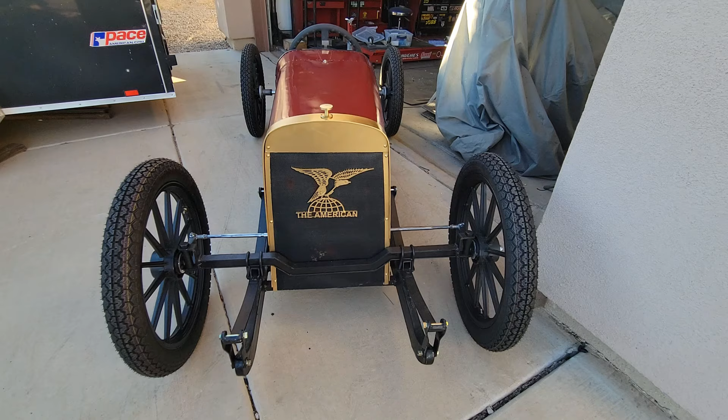Off the lift. A proud moment, a big moment. We're outside the garage, we're on our wheels. We're on the ground level.

It steers, it rolls, it stops. Still got to make the motor work. We got to get the motor working, but that'll come. That's the motor I actually took off of the Austin 7, so I know it works. I just got to get it running.

The American Underslung Speedster, they made them from 1909 to 1913, I believe. Had a picture of one that was from 1910, so I call this one a 1910 model. That was the particular one I used as inspiration.

It came out dang perfect. You know, I didn't share a lot of my drawings on this, but I used them as reference. I used the inspiration car, really dissected it, and I couldn't be happier. I wanted to catch that Art Deco, real rich color, the big presence, and I hope I got it. I hope I got it.

We got blood red on the paint there. This yellow anodizing, I like the way it made this aluminum look brass on the back, but I didn't like it on the front pieces. So I used gold - that's gold, and it looks brass. So I think I'm going to end up doing the gold back here to make it match. Just to make it match.

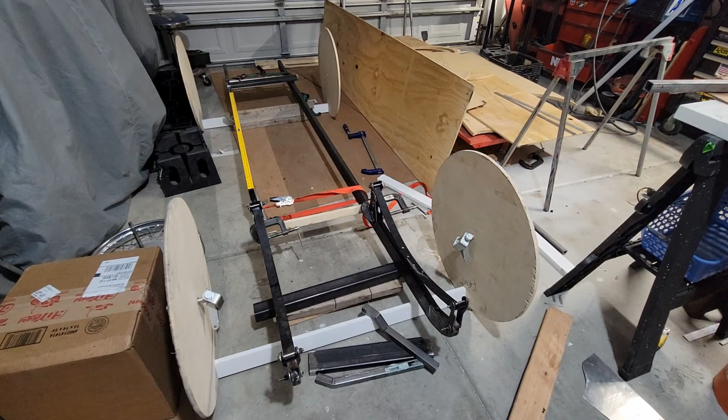All right, let's see how quick of a video I could make and bring you up to speed on where I'm at on this Edwardian build here, this Edwardian Cyclekart build. I ordered the 18-inch wheels, still waiting on them.

Don't have them from Thailand yet. They're the ones Kelly Wood and Steve Vinson talked about and shared information on the Cyclekart forum and on Cyclekart North America page. But I did get these, what are they, 275 18s. Pretty good looking rubber.

Good historic looking, vintage looking rubber. So with the tire, I got the size of my wheels, so I got some fake wheels cut for mock-up. I got them 36 inches inside to inside, so hopefully I'll end up with a 40-inch track and not be too wide. Kind of looks a little wide, actually.

31 inches on the inside to inside of my seat clamps right there - not seat clamps, spindle brackets. There we go, spindle brackets. I played around with my frame width.

I was going to go 18 inches in the front and 24 in the back, which is a little bit bigger than most people will run on a little small Cyclekart. You can get these things like 16 in the front and 20 in the back, and most people can still fit inside them. But this one is a big car. I wanted it to be big.

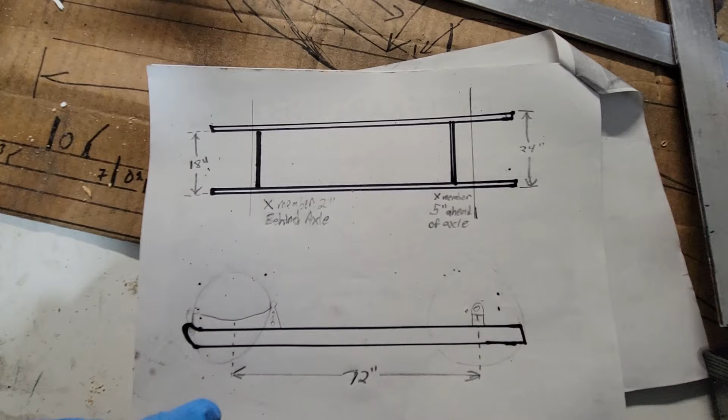It's an Edwardian, so kind of its size is a thing. 72-inch wheelbase, which is really long wheelbase. You know, if you're building a regular Cyclekart, aim for like 64, 66. Shorter is cuter, cuter is better in a Cyclekart. Remember, it's a caricature. But this thing's going to be a little bit of a monstrosity, so I wanted it to be big. So those were my starting points.

I ended up with I'm 20 inches, and I didn't like the tapered look of the frame, so I did a couple mock-up cross members, and I'm at 20 inches outside right now on what you're looking at now.

Did I say it's underslung? Of course it's underslung, the American, right? So the American had this cool looking front - the front end looked like this.

So we want that front end in there and play in with, you know, I got the ride height where I wanted it. I think I'm at 6 inches right now. Of course, it'll depress in the front. 5.5 in the back and 6 in the front is what it's mocked up on my floor right now. Got a level on there, trying to make sure things are level.

Nothing is welded in this frame, by the way, other than the front piece right there. The brackets for the rear of those springs - they are not even on there yet.

So we want that mustache cool front end, making front axles, or trying to figure out a front axle. I have a tube bender over there, but I wanted to make this one without it. As I started looking at the inspiration car and figuring out how I wanted the axle to look, the bend radius is such that the tube bender really wouldn't be great for this, because it would be difficult to get these in the right locations.

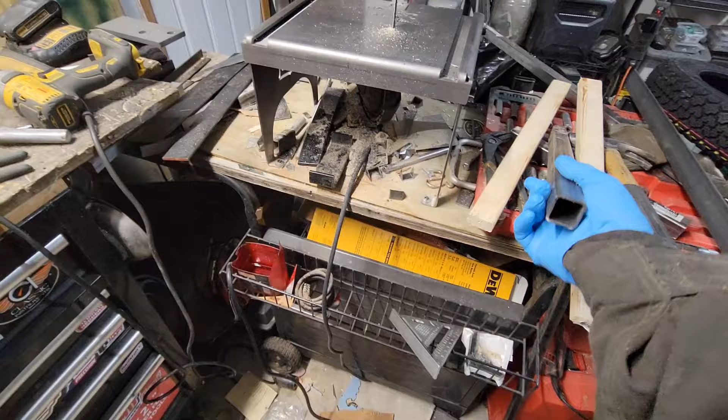And it's pretty thick wall stuff, by the way. This is not what you get from Home Depot. You get this from your local supply store, and it is 120 wall. It's pretty heavy duty. It's pretty heavy junk.

If you're worried about that being too weak, you could put flat stock on it, and then it makes it look like an I-beam if you put the flat stock on the top and bottom. I actually did a video, I did an axle for a buddy of mine like that, and it really makes it heavy duty. It looks kind of cool too, actually looks really cool. So that's probably what we're going to do on this one.

I use a piece of angle iron here as my straight edge, so I keep the thing straight. And sometimes these have a bend on the end where they meet the spindle bracket. This one's not, it's going to go plumb straight into it.

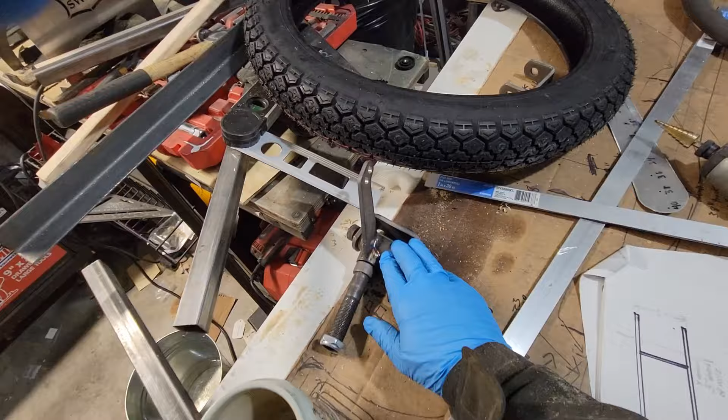And then I got to do this fancy looking gusset piece like the inspiration car to the top of the spindle. I'm not sure what spindles I have. I have some of Mark Parnell's fancy ones from an earlier project, I just didn't use them. But then I also got some Azusa's, so I'm not exactly sure which spindles I'm going to use just yet, but we're working on it.

All right, let's see if I can do a little bit of work here, and then come back and have it sitting on these things.

Well, okay, so I got a little carried away. Obviously, I got the flat stock on the top and bottom, booger welded on the back, just spotted on there. Go back and clean that up. I'm trying, I don't want to do too many welds on the front.

Could have used wider flat stock to make it more pronounced, give you more of that I-beam effect, but it ain't bad. I wish it was a little bit better, but I think once I get it painted, you'll see it'll have that I-beam look going on real good there.

And then getting the height right for those things, I could raise the whole thing up, but then it would have some crazy rake. So I made some little spacers in there for now. I'm not super pleased, I don't know.

There's only a minute of this. I worked on this for an evening here after work. I'm gonna work a little bit more, let's see what I could do. You know how it is, you get to working and you forget the camera. So yeah.

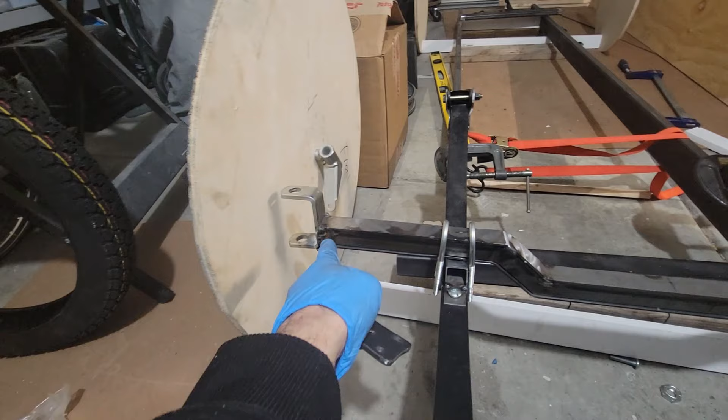So I put the center of this in the vise, and then I grabbed the end of it, not the bracket, but the end with a giant pipe wrench, and I torqued it back a couple of degrees, then eyeballed it till it was about right. I still got to run the bubble level on it and see where I'm at, but I think it's probably closer to 9 or 10 degrees.

All right, let me do some of that. Proof that I really don't know what I'm doing.

It is now 5 inches ride height. I thought I had it for 5.5 or 6. It was a couple days ago in my head, but if I put all these videos together, probably in the video 3 minutes ago I said what it was. I didn't write it down, so I don't know.

Alright, so the back wheels are still screwed into a support board holding them up. The front wheels, I took the support board off and just got them in F-clamps, and I got them on the spindles, so they're actually there. So the weight of the thing is actually on the suspension.

Interestingly, the cross members are not welded in. It's just a stick. Yeah, it's another stick back there with a ratchet strap holding it tight. But right now, I could take the ratchet strap off because the front suspension is holding it together.

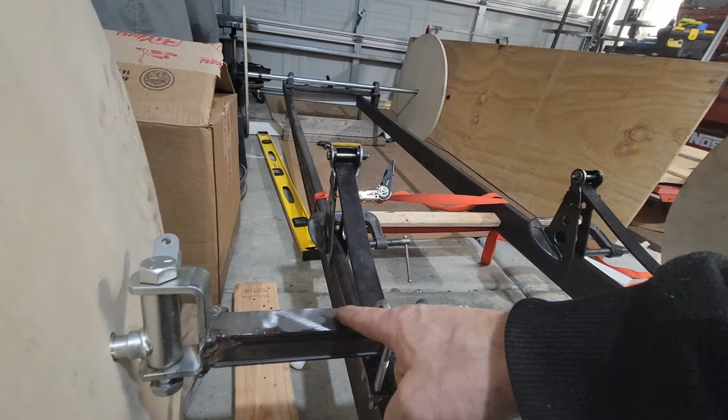And what? Oh shoot! I didn't run the bubble level yet. Hang on. Yeah, there you are. It is. There you are. It is 7 degrees. Both of them.

How did I get them both perfect like that? I don't know, that is definitely a lot of luck. Normally I'm off as much as half a degree, and I go back and tweak it a little bit to try to get it closer. But bang on 7, I will take it.

Now, if you're going really, really fast in these things, you probably want more than 7. But the problem is then the wheel gets floppy, like it flops like a motorcycle, like if you have a chopper on the front wheel at low speed. Yeah, at low speed it's got this weird flop to it. So there's definitely a sweet spot. I think it's 6 to 7 degrees for these wheels and tires. I'm sure someone else has a different opinion, but it works good for me.

Okay, what's next? Get the back there, get some cross members in there.

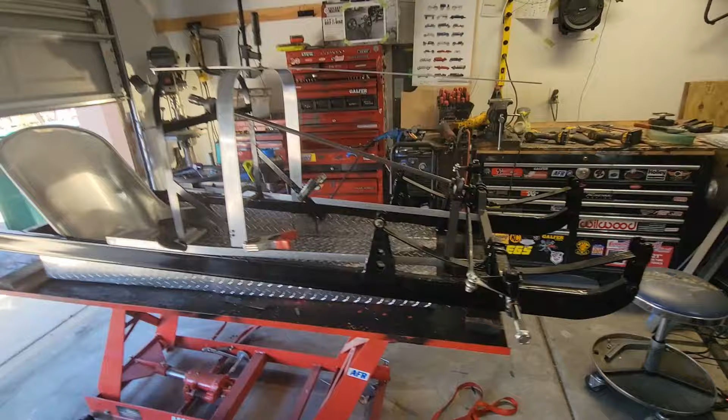Obviously skipped a few videos. Sorry, but this is where we're at. It's still an Edwardian, I don't remember. The last video I took for this thing was so long ago. My intent is piecing these all together. Hopefully that's what you're watching, is all these pieced together. Maybe I'll put some pictures in there. Didn't really do a good job of documenting this one.

I do the dash support where I would need it to be. I started with a piece of MDF. I get the MDF cut to the shape, height, radius, corners that I like. I get it put where I want, where I like it, and then I make it in steel.

This one happens to be 1 inch wide, 1/8 inch thick flat stock. A little wibbly wobbly, but once you stick in a 1 inch square tube cross member for your dash support and these kickers, it works pretty good. I had to play with my kickers a little bit and lengthen one, and well, that looks ugly, but it's just the self tappers.

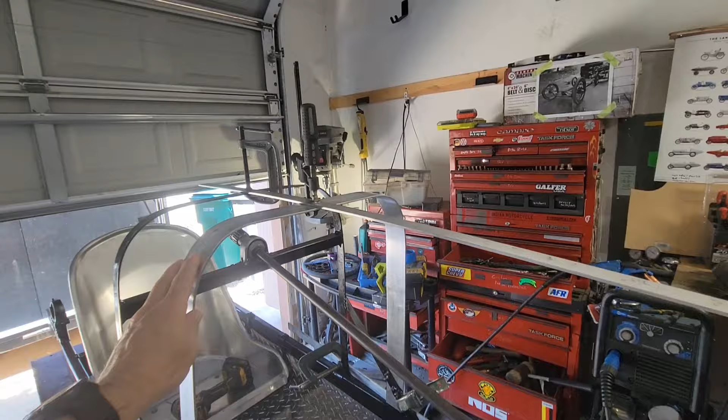These are just temporarily in right here. I'm doing my main hoop and then my secondary hoop. This is where the hood will rest, and it starts to get smaller. This particular vehicle, kind of like the Blitzen Benz, just slowly gets naturally smaller toward the grill. The vehicle I'm making a caricature of had versions that were more pronounced, but the Speedster didn't have fenders or anything like that. It was gradual, so this one's going to be gradual too.

So that hoop, I happen to make out of 2 inch wide, 1/8 inch thick aluminum, call it 125 thick, whatever you want to call it. You just make it a little bit smaller than that one. It's a whole lot of bending in the vise and bending around your knee, bending it in, taking it back out, in and out. The first one gets made pretty easy, but the rest of them, man, you might spend an hour bending these things to get it just right. You really want to take your time and get that curve nice and smooth, with no flat spots.

Now that I look at it, there's a little bit of a flat spot, so I may even go back and work that one out just a little bit more. But you take your time and get that one right, because once you put sheet metal on it, you'll definitely notice if you don't get that bend right. It doesn't take super talent or tools, just time. I literally just beat on it with a hammer and a vise. I'm sure there's an easier way and somebody knows it, but I don't. It's just time, and that's what I do.

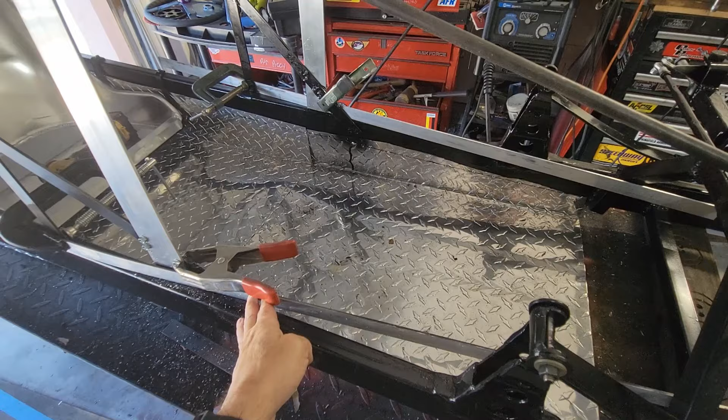Okay, and then these are guides. I just have these down—oh, it's not even clamped on right. So these are just guides to let me know where the sheet metal is going to go, and I want to make sure I like the profile and what's going on, and that it matches the inspiration car, which I don't have here. You can see it's hanging, the weight of it's hanging right there, so I actually might make it a little bit taller than that.

And then my front support, my radiator, is going to be on that cross member right there, which is purposely put between the axle and the steering support. So when you're laying out the front end of your car, the way I do it—I can't remember if I figured this out or watched it on Dennis or Steve or somebody else's videos—the axle centerline, I put my cross member just behind that, and then my steering support behind that, so there's room in there for the front end support, the front body support.

And then when that one ends, you actually have the steering arm coming out of the body behind the grill. Now that's also contingent or dependent on the caricature car, and this particular inspiration car did have it that way. So, which I don't have a picture here to show you, but that's the way it was.

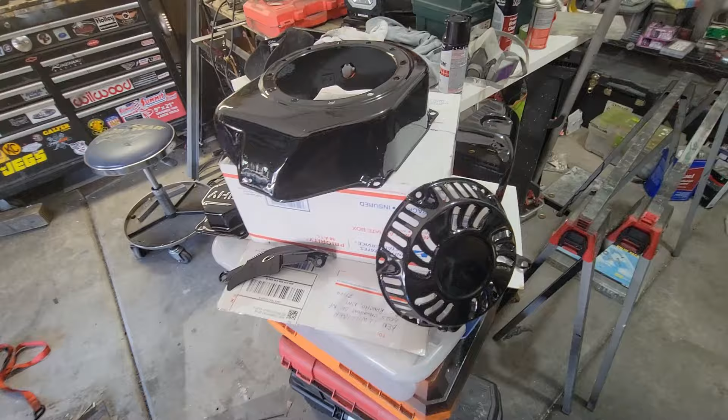Chassis black. Oh yeah, look what Randy sent me - Randy Wright, unsolicited from Texas. He just sent this to me. I sent him pictures of my engine I was putting in it, and he powder coated these parts. Look how good that looks. Holy cow, thank you Randy. This is jewelry, this is engine jewelry.

I'm glad it did look good. I'm sure it's fine, that's why you powder coat them, right? You powder coat them because it holds up real good. So this is going on the motor - those are my motor jewelry parts.

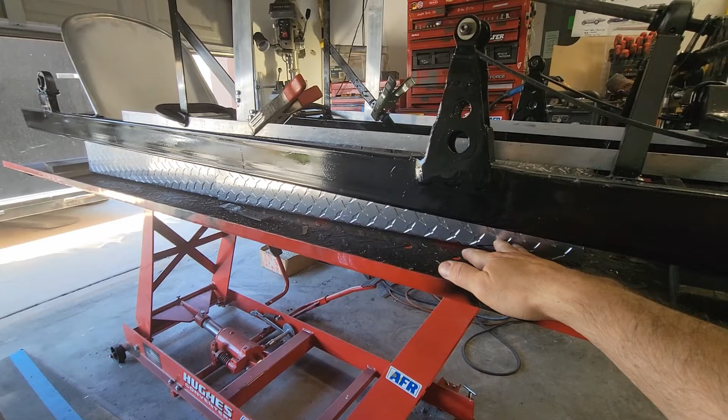And this car is going to be chassis black. Most of it's going to be black, there'll be a little bit of aluminum. I've got to cover that up - I don't like that, it's what I could get from Home Depot for when I was doing the floor. So I'm going to have to cover that with something because it doesn't look period right.

Chassis black, dark blood red for the body panels, and then as much brass as I can figure out, because there was a lot of brass on the Inspiration car, on the original car. A lot of brass, so I got to figure that out. I got a brass horn, and I don't know, I got to figure out some more brass pieces.

And then again, this is an Edwardian, so we're getting the 18-inch tires, which you can see I really boogered up right there trying to get rubber put on them. Those suck for putting rubber on. So two of them I pinch flatted - they're still leaking down, hold air for a little bit. I'm not looking forward to redoing that.

And then Edwardian, you know, officially - I don't plan to release this video till after I get the car built, so when people see the car they're going to go back and watch the video and go, oh yeah, that jackass. So Edwardian, the bottom of the seat is supposed to be 4 inches above the axle. That's what they want.

And it does have a cool look, it absolutely has a cool look. Live in my neighborhood here, you know, if you look - but my favorite Edwardian, there's a bunch I like, but I really like Steve Vinson's Franklin. Man, that thing looks cool as hell, really looks good.

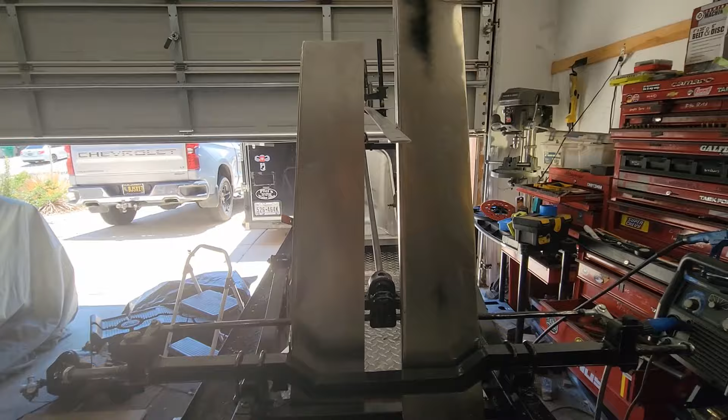Jumping in on making my front end support, grill piece, all that. First thing, I kind of got to understand what my basic shape is. My pictures are all on my phone, I didn't print any for this one, so I can't show you a picture of what the front looks like, but I know what it looks like.

So I got this bar and that bar to get the overall profile, the sag, and it actually has to come up a little bit. Figured that out, so I got my measurements. The frame rails are 18 inches apart.

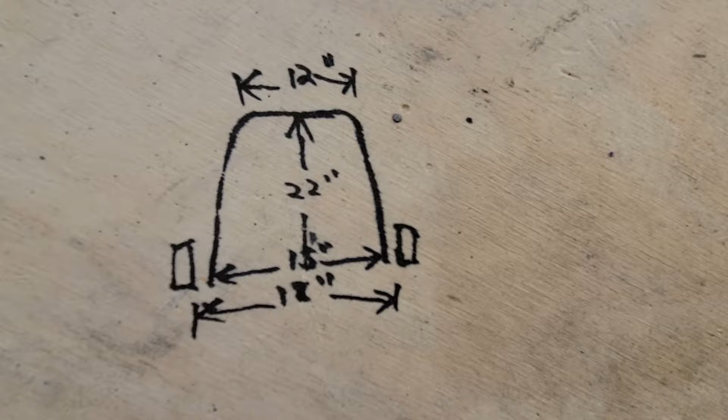My front end, I don't want to call it the radiator because the radiator cover is going to go on this, it's actually the support I'm making. It needs to be 15 inches wide, centered on that 18 inch chassis width, 22 inches high, and then 12 inches across at the top. That's what I loosely figured out what it needs to be.

So I transferred it to a piece of paper, put it in there back and forth, got it as best I could, and transferred that over here to this MDF. So let's cut this MDF.

Okay, cut it quickly, I just jammed it in there to see if we got the profile right. So the profile pleases me, pleases my eye line. It should be just nicely going down, almost flat, but not quite.

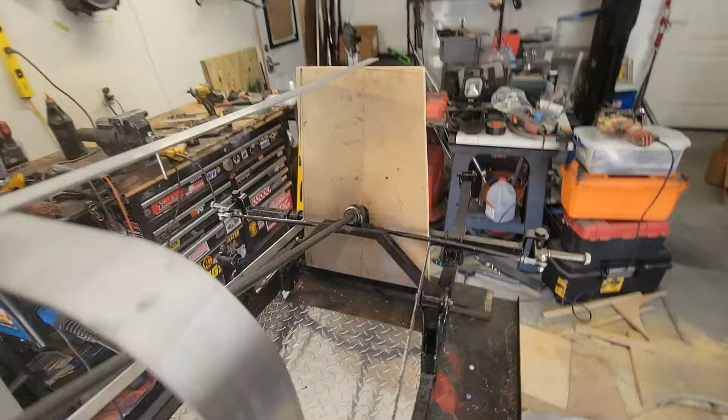And then on my sides, it's got to clear that post right there, which it just barely does, just nicely. Just barely, right there, we're right there at it. Maybe it needs to come a smidge that way.

All right, now we need to radius the corners there and look at it a little bit more. Wow, so getting the top of this right to match the inspiration car, I spent more time on this than I did cutting out the whole piece.

So attention to detail, attention to detail, attention to detail. I'm flipping back and forth between pictures on my phone, looking at the front and looking at images I saved and sketches I made on the computer, which I didn't print. I looked at it and got the basic shape right.

Okay, so I got that right, but then I didn't get this right. The Speedster was flat up there, kept a radius curve there, and it came forward, but the grill was definitely peaked there, so it wasn't flat, it wasn't Frankenstein head flat.

And the buck, so I'm going to use the buck as a guide to bend my support. You may think, well, this MDF, I just have to get it close, I can bend it, whatever. No, you really want this MDF to be about perfect. You want to get this buck that you make, this guide, to be as perfect as you can get.

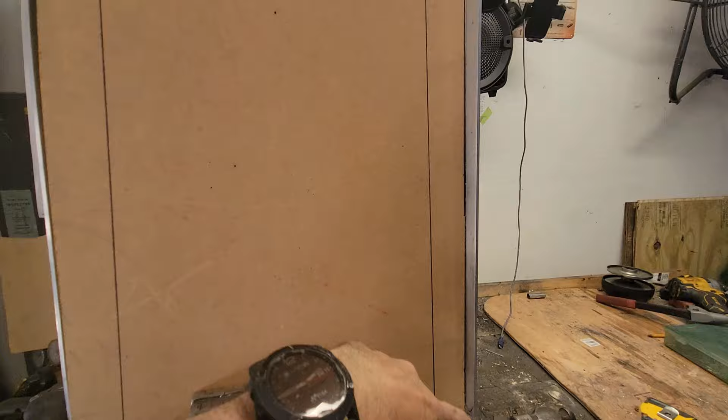I put a witness mark in the center of this piece, which I've trimmed now, but I had it longer than it needed to be. Center mark of that, and literally start bending around my knee, and you get it about right, and spring back's killing me a little bit for holding on there.

And then you flip it back and forth, put it on both ways and take it off, put it down, take it off, put it down, take it off, a whole bunch of that.

I didn't look at the clock, but definitely got some time on it. So we'll get it like there.

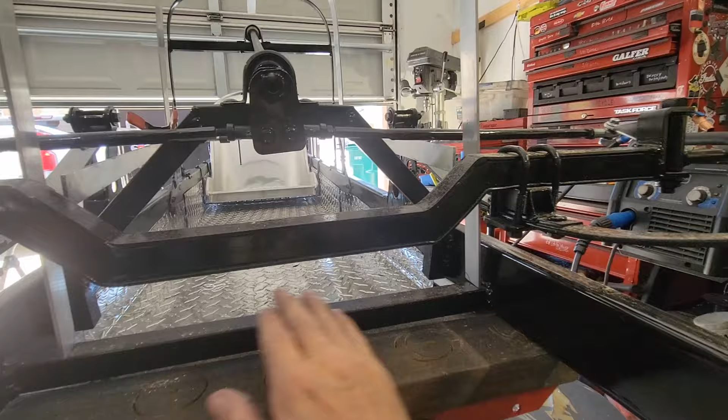Now the piece will want to bend, it'll want to do that on you. So what I do is I'll have a piece of angle down here, stuck to this cross member and up onto there to hold both those sides. That'll hold the base. Then I'll have a strap coming from that cross member to here, and a strap coming down there, and that will center this, and I'll just rivet it. Then when I go back and do the side panels and the hood, I'll maybe undo those rivets, and maybe put another rivet back through all three pieces. I don't know, whatever.

I've done stuff like that. I'm trying to remember how I did the Blitzen Benz, and that's kind of what I did there. So now you start to get the shape.

Also, if you aren't sure of the shape that you want, don't do any of these in metal. Just do the MDF over there. Maybe do one of those, but definitely do that one. Do your front one. In fact, I should have done that one when I did this one. I skipped that step, but do both of those. Put the MDF up, and then you can run tape and put paper.

I like that packing paper. Use poster board and tape it down and get your shape. Make sure that it looks right, because you definitely want it to look right before you start doing these metal pieces. I mean, you can redo these too, but it's a super pain in the ass.

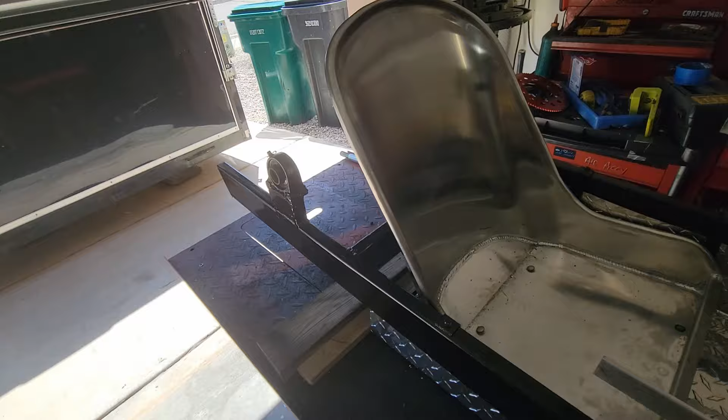I might skip doing body panels for now, and then do the engine, because I have not done the engine at all back here. I haven't done anything for it. So I still got to figure out where I'm going to put it and put my cross members and all that stuff. All right, hold for now.

All right, front of the buck for the front grille. And it came out all right.

We have it in. I made some L brackets, which you really can't see in there. Thin, 085 wall stuff. I actually cut a 1x3 to make long leg brackets. God, you can't see anything other than my booger welds.

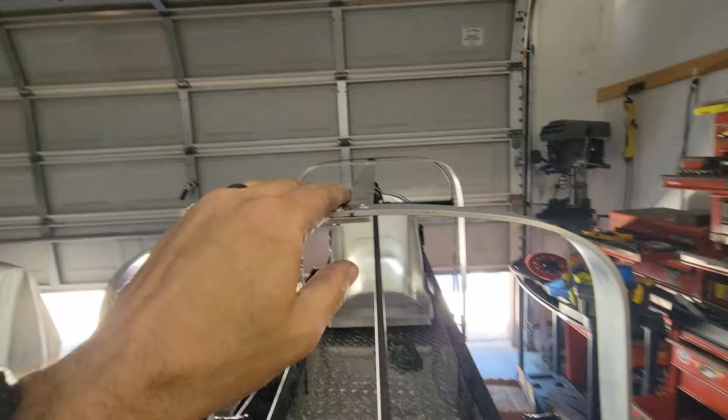And then rivet the aluminum. It's painted black, so you kind of can't see it. And then a flat bar riveted down the center. Boom, and that's riveted in a couple spots there.

Those rivets will actually end up coming out, because when I put the aluminum down, I'll go through the aluminum and pinch all that together with rivets. And then there'll be a center piece right here I do. Or maybe I'll do this in one piece. I don't know, it's really hard to do this whole piece in one piece. It's really, really difficult. If you do it in 3 pieces, it comes out a little bit easier.

Side pieces right here are pretty easy. You gotta make some clearances for the steering linkage, and then a clearance for this steering support I made. In hindsight, I should have made the steering support come low and this way and then angled up, because my sheet metal is going to come right through here. You can see that's the side of the grill, so my sheet metal is going to just barely clear this stanchion right here. But it'll be all right.

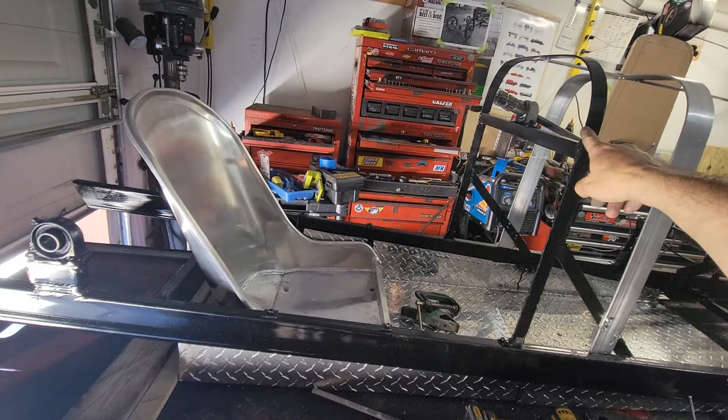And I started to do one piece, and I was going to have it just come down like that, which it might be okay like that, but I think it would look aesthetically better if it comes back all the way to here.

Or maybe even come up a little bit, or come up to here. Maybe I have a post right here and then I cover all that with something. Maybe I do that, but I kind of don't want to cover all that because I want airflow over the motor. I'm learning that if you box the motor in, it definitely will contribute to it overheating. So I haven't really made up my mind on the back there. I know the top of it is going to have like a fuel can, but it's going to be a fake fuel can I'm going to make.

I got to look at Steve Vinson, because I think Steve and his Franklin, which I looked at in person, I didn't study his fuel can arrangement. I got to go back and look at his videos. I think he made a fake fuel can that really looks right, but I think it just works as a cover over everything back there. I think that's pretty good.

All right, let's continue movement.

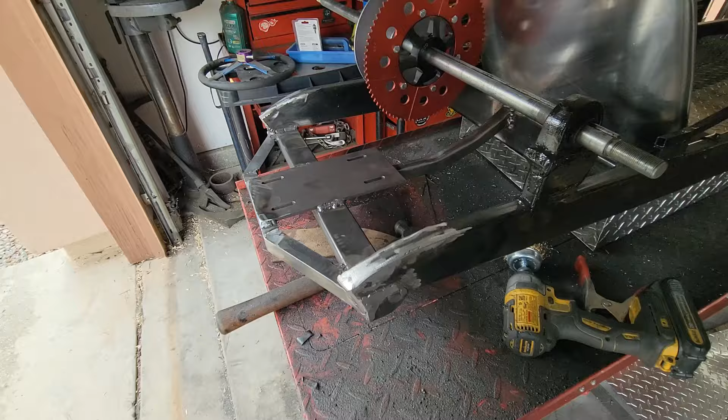Okley dokley, so we got the back end look I was going for. I don't even know where I left off with the last one. But it's all right. So we got, I know we talked about that being in there and that being that way. So I zipped this bar in all the way around, lots of heat.

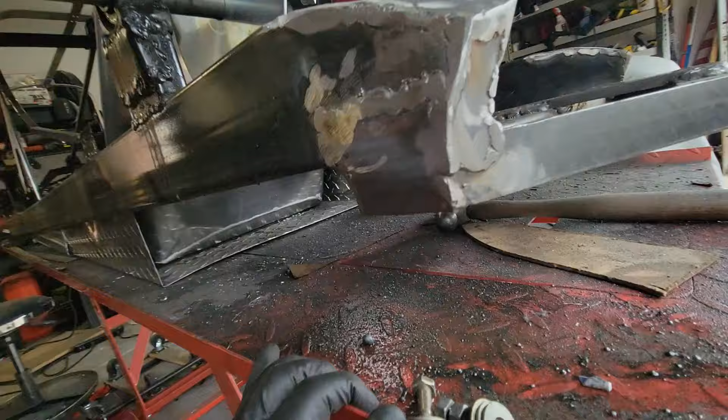I had that thing in, and then I made a plate, this plate right here, that goes on around, and then I seamed it all on kind of like a fish plate. And then the back of it, again, paying homage to the Inspiration car, it kind of has a fast look when it comes back. Both of them kind of come back, they sweep, but then they come in at an angle, and then they follow that curve as well.

And I just cut out a pie piece, which you can see, there's one right there. So I just cut out this scallop, sorry - probably not that one, that probably isn't the one I did, but maybe it was. Cut that out, and then the top stays on, you bang it around. One's just further inwards than the other one. And I kind of give it that look.

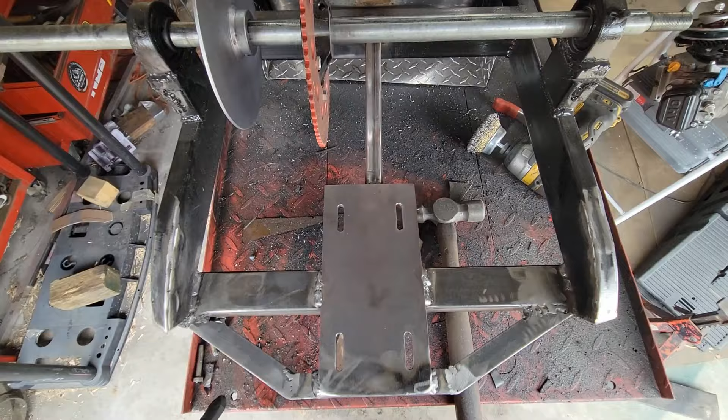And I was going to just clean it up and just paint it black, and deal with making it look pretty later.

I think what I'm going to do is, because this is going to be exposed, the engine's kind of going to be exposed a little bit on this one, just because of the way the design is. There's going to be a cover that goes on over here, but the engine's going to be exposed. This is going to be exposed.

And I wish I'd have done a better job of that thing. That stanchion right there looks like hell. So I'm not decided exactly how I'm going to do with that. I may knock that off and completely redo it because I'm really not happy with the look. But let me focus on one thing at a time.

So this, I'm going to smear some body filler on. I'm going to grind it a little bit better too, knock some of those big welds down. And if I get down where I see I didn't get any penetration, I'll go back in there and give it some heat again. But it looks like I'm getting marginally better with my welding.

I'm obviously not a professional welder, but it's getting a little bit better. I'm not blowing holes and stuff quite like I used to, but I still like to put a lot of heat into things. So anyways, I'm going to grind a little bit more, clean this up, and try to make it look quote-unquote pretty. Let's have a go.

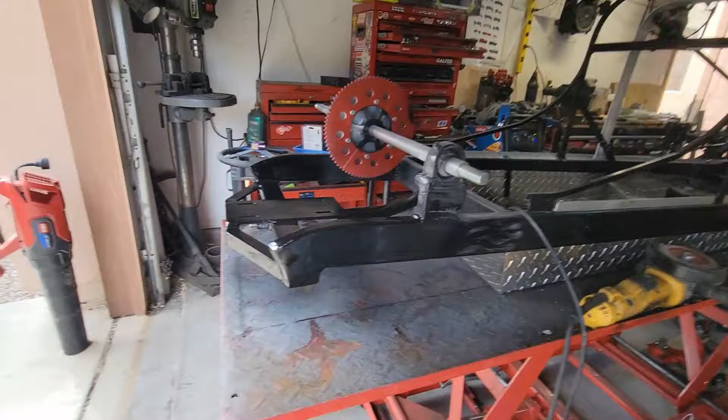Alright, we smeared some body filler, did some grinding. I didn't have to go back and weld anymore. You can't really see in the dark - well, not the dark, but the shadows. Lighting is poor. And I just spray painted it, threw some paint on it. So it looks alright, doesn't look perfect.

I'm a little hesitant. It's not as pronounced as I thought it would be, but it's alright. It's definitely good - it's a lot of work and effort you might not even notice when it's all said and done. And I still hate the stanchions that those are on, so, but that's alright.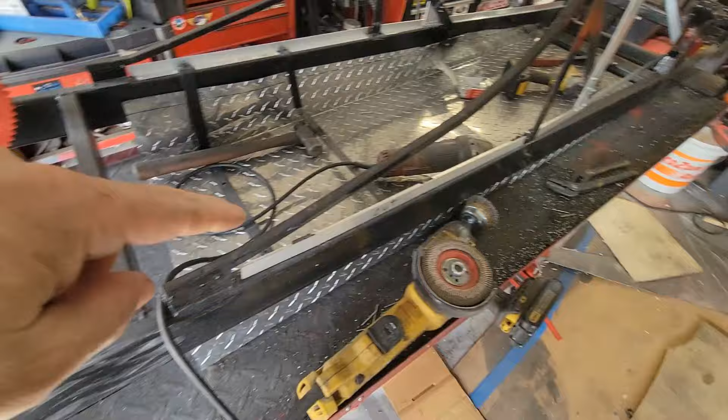So while I was waiting for body filler to set, I did these brackets right here. The way I do my body panels, it's just going to be sheet aluminum.

Whatever it is, I just get the cheap stuff because I'm not welding it, I'm just cutting templates out of it and then riveting it on. So put this angle on here, this aluminum angle, and just blind rivet, pop rivet it down. It's got to follow the body line because the aluminum panel I put on here will rivet all the way around there. Obviously, if you don't do something on the bottom right here, the panel will be really, really loose.

So I think I'm going to do one across right here also, and then I'm going to see if I can get away with doing this and this in one piece. If I could do that in one piece, I think that's the way I'll go, and I'll still run a seam of rivets that way.

The previous cars I've done this in a piece, that in a piece, and then this in a piece, and it's problematic getting your seams right. It's really, really difficult getting your seams to get right and look right, and get your rivets' spacing correct and all this, that, and the other.

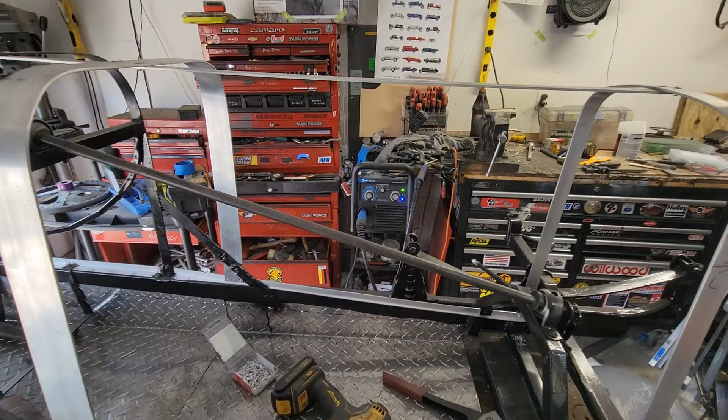I don't know if I'll hinge the hood. The hood may be one piece. The inspiration car, it's kind of hard to see, I can't see exactly what's going on. They often were hinged on the top. The inspiration car did not have any straps that went over it, it was not strapped down.

It did have some holes punched in the side right here that were kind of odd. I think they were intake holes. I'm not sure, but we'll work on that.

Okay, paint's drying, let's do a couple panel pieces. What I'd like to get done today, before tonight, is these panel pieces and these top pieces on both sides, so that I have some rigidity.

It's pretty rigid, but it's hard. I can't show you on camera, but there's a little bit of side-to-side play, and I know once I get these side pieces and these top pieces put on there, that will tighten that up really, really good. And then when I go to get it up on its side, go underneath it and do some work, that being on there to hold it tight will help keep things square and keep it from moving around.

All right, so get to work.

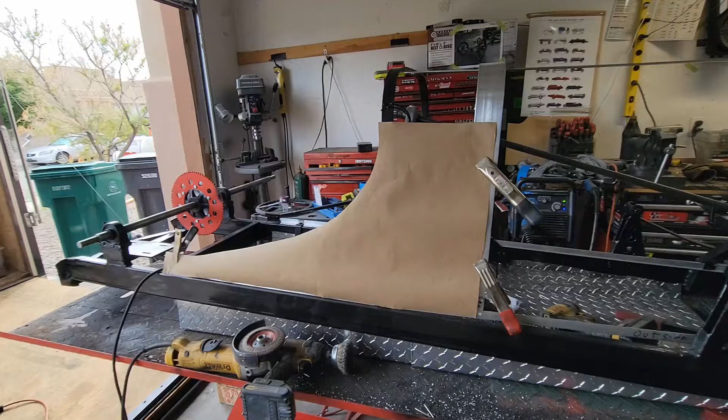Second piece of paper, the first piece of paper I didn't like for a template. I love this packing paper, I'm a big fan of it. So I got it about where I wanted it. My plan is I'm going to beat it, it's aluminum, I'm going to knock it over this bar right here.

And then I got a piece of trim, rubber trim I got, it's 1/2 inch to go over that whole thing. So I made it a little bit bigger than that. I want my flat edge, straight edge down there. The factory cut on this sheet of aluminum is always better than I can cut it, and I want my factory cut of aluminum there.

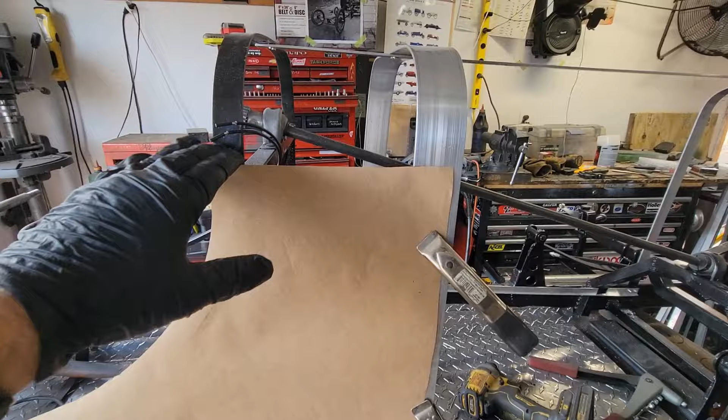A little bit longer there, I might have to trim that back. And then I wanted this below the curve of that and put a seam in there. So then I'll take this, which I've put back on here just to show you, and put it on my aluminum.

And then I cut it out with my Harbor Freight cheapos right there. I cut it really big, much bigger, and can't do it with one hand.

Hang on, there we go. So factory edge, factory cut, not factory cut, but the machine shop cut edge there. Flat edge on the bottom. I just got it clamped in place. You'll see I got a lot of extra meat on it, but that's about where I want that to be.

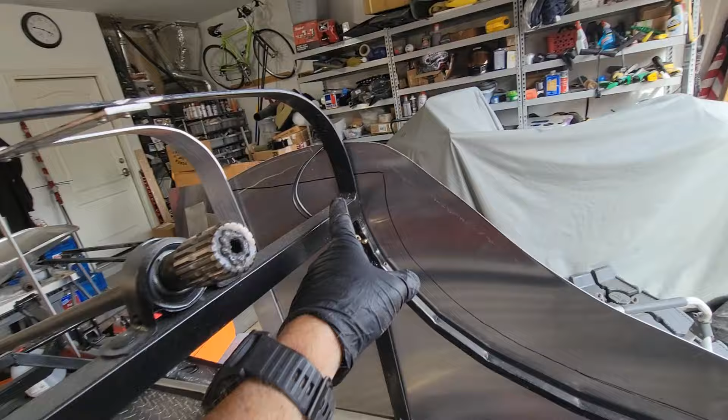I've got a crimper that will put a little bit of a crimpy, ugly edge on it actually. And then I'll leave extra here, this bit, again to beat it around. And then looking at it, what do I need to do before I get done? Not a lot. There's not a lot of shaping that needs to be done here.

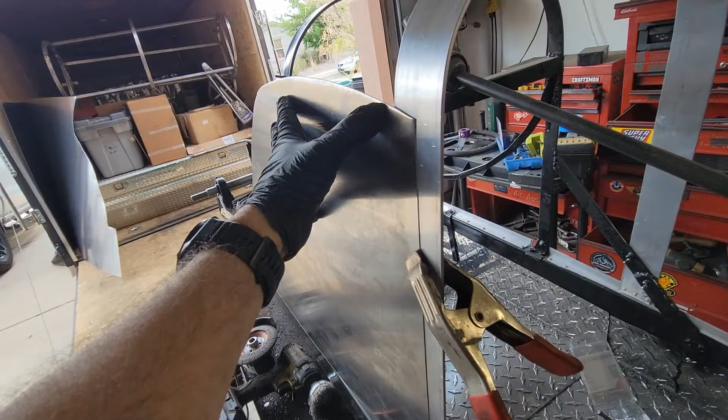In fact, the only shaping that's going to happen here is where it narrows from here in, and it's going to be a nice gentle curve. I've found, even with more curve than this, as you rivet it in, if you rivet the top of your curve, and then move the aluminum around as you rivet it in, going no more than 1 inch, like I prefer 3/4 of an inch spacing, it will pull the aluminum into the shape of the panel without having to use your English wheel, if you don't have one.

I actually have an English wheel that I got from Rick Eggers, but I don't have a lot of space in my shop, so Rick's probably suffers from the same thing I do. No shop space-itis. So it's hard to set some equipment up. But...

Let's go ahead and rivet this thing and see what it looks like. We'll practice what I preach here.

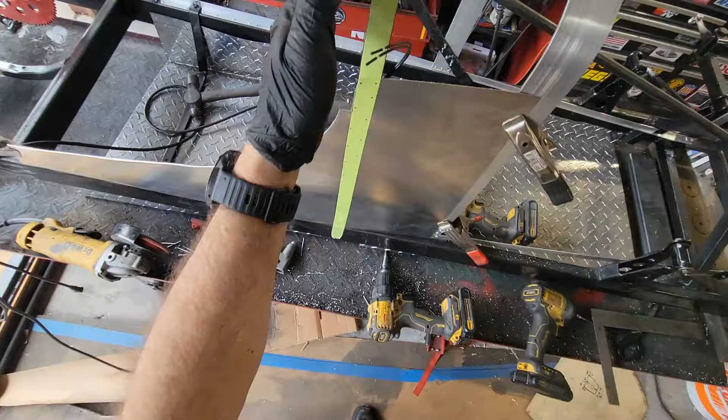This was my high spot. I determined that this bar right here is where it's going to be. It's going to bend this way and this way, so I want it to bend around this bar. So I clamped it in place as best I could, eyeballed it this way, that way, got it where I liked it.

And then where do you find this bar? On the inside. So I did 2 starter rivets down there. Drilled the holes from the back end, and then I put the rivets in. That helped me locate my marking tape. And then I marked 1.5 inches.

That one I screwed up. 1.5 inches, so that's going to be my pattern, and then I'll try to replicate that on the other side as well.

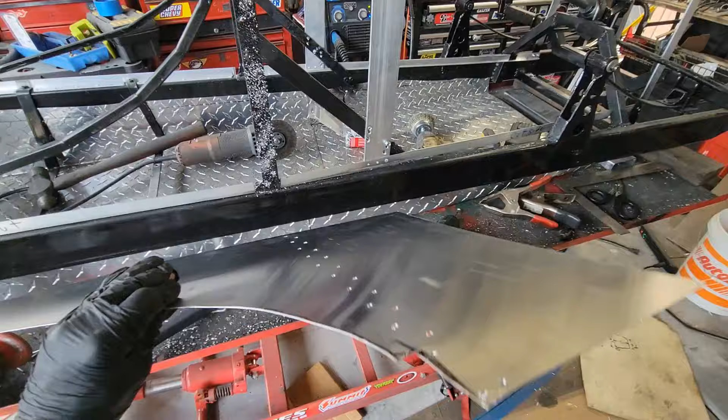All right, I just pulled the tape off. The 2 starter rivets, I drilled them out. So we pull this off, and you'll see all the mess on there. We're going to clean all that up.

Looks like I ran into the edge of that piece of flat stock right there, and I broke the drill bit off, so I got to figure out what I'm doing with that. I'll probably drill it out. So I already ruined 1 drill bit. I just started those 2, so I'll finish those out.

If you really want your job to look clean, you go back and deburr all the holes. If you got a deburring tool, which I do not have, I just use a uni bit and kind of bevel the hole just to deburr them. But that's pre-drilled for it.

Okay, let's clean this up. So that's what it looks like. A couple of mistakes I made. I drilled into, I guess, weld or something.

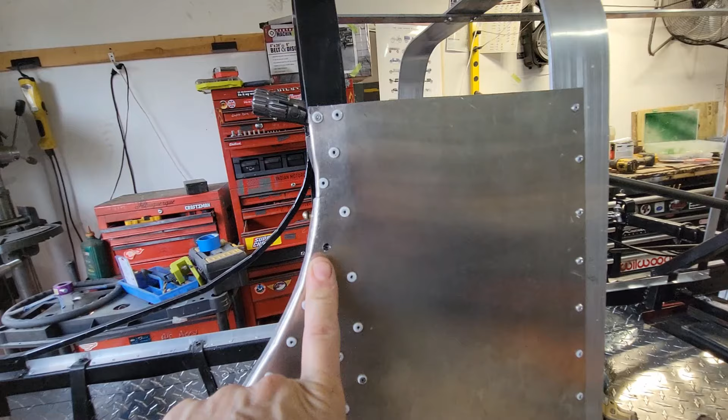Broke a drill bit off in there and boogered up a couple drill bits trying to get in there and clean that out. It happens. So if you're drilling into slag or weld or something, just be mindful of that.

Everything else came out pretty good. Got my spacing, ended up going with 1 inch here and then 1.5 inches, but it's offset there, so it actually ends up being 1/4 inch between those guys. This piece, the dash was going to come in here and cover this up, so that'll do that.

When I was beating on this, I hit my fancy brass switch, so I got to get another one of those. Broke it. The only real bend it got was right here. The crease was right there, and I pulled it around here, worked it up, and then just pushed it by hand to get in, and it got a little bit of a body line there.

Looks pretty good from a distance. It's looking like I want it to look.

One thing I didn't do that you can do is tape the whole body up in paper, the entire thing, to get a look at what you want. That's actually what you should do. It's what I should have done, because I don't know what I don't know. I may run into a problem because I didn't do that, but I've done this before, so you know how it is.

You don't want to skip steps, so I definitely skipped a step. Another thing I could have done, I didn't think about it till after I got most of these rivets in, is once you get this piece like you like it, before you start riveting, go around to the other side and see if it marries up and if it's the same piece of metal could be used on the other side. You've done a good job of keeping things symmetrical.

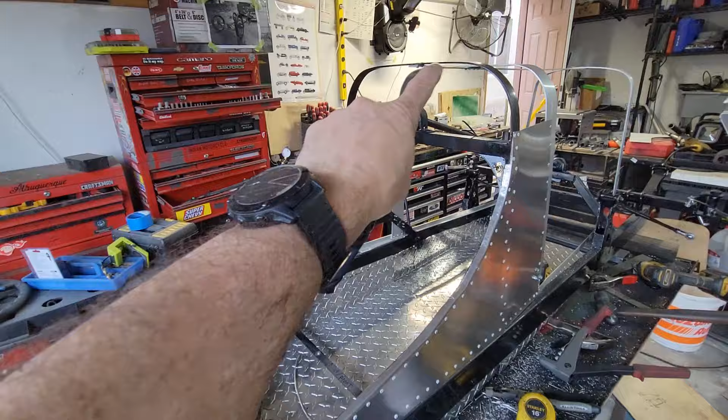All right, I'm gonna go take a break, and we're gonna do that one, and then we'll see how much energy I got left if we could do the top. I may have been a bit ambitious thinking I'd get this all done today.

This part never gets any easier. Well, this is 2 days of work. I thought I was going to get finished yesterday. I just got one of these in yesterday. Instead of doing these in 2 panels like I did in my previous ones, I did this in 1 panel. Just a little bit more challenging to get the size right and everything. And then I wanted to do this in 1.

But this piece stretches and grows as you bend it around, so the easy way is just to do it in 2 pieces and then do a center piece up here. I think that kind of makes it stronger anyways, and it don't look bad either.

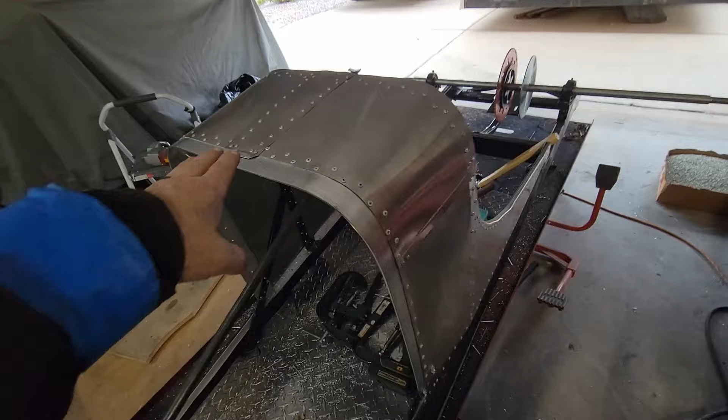I tried to do what I could for marking with the marker to get my spacing on my rivets right as best I could, so there's some uniformity going on.

This is the 4th dash I made. Well, more than 4, because I had some failures in the past, but this one was one and done. And I didn't want it to look too pretty, I wanted it to look old and kind of beat on. So which I probably couldn't make it look pretty if I wanted to, but that's what I came up with. She don't look bad.

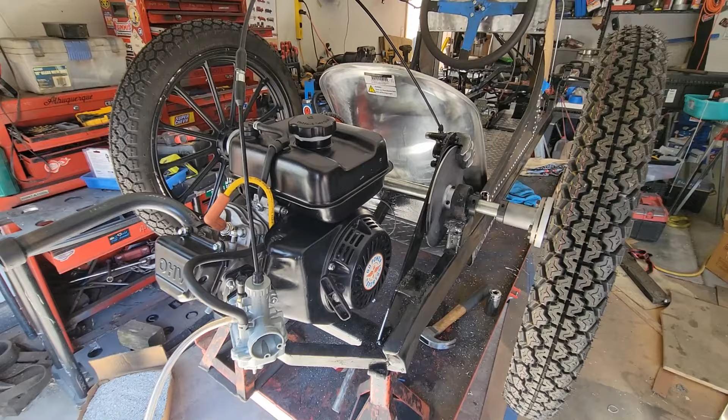But we got an axle in there, we got the tires on there, we got the engine mounted. I'm about to try to... I did test bench fire, so it does fire, but I haven't fired it up sitting on here yet.

Brand new chain, that chain will stretch. That's not the axle I'm even going to use, so that axle's got to be swapped. This is too narrow, the track is too narrow. These hubs that Mark Parnell made, it really set them really far in, no fault of his or anything like that, it's just the way the design is. So the neck of the step down shoulder of this axle is just right there, so this tire setup goes really, really narrow.

Okay, I pulled the safety pin. Let's do this. Don't hit my foot. I strap.

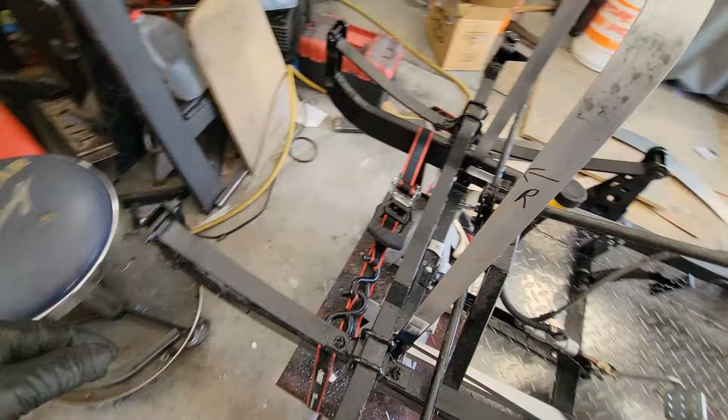This is how I test fire on the bench here, or on the table. So I ratchet the frame down really, really straight. You could do it twice, could do it in the back as well, but I'm not fussed.

It's pretty sturdy, so the goal here is I'm going to fire it, jump in it, hopefully it runs, jump in it, and then I'm going to do a brake check, throttle and brake check. So a bad switch here, so I had to, off is up, on is down. I got to fix that. We got gas, let's see what happens.

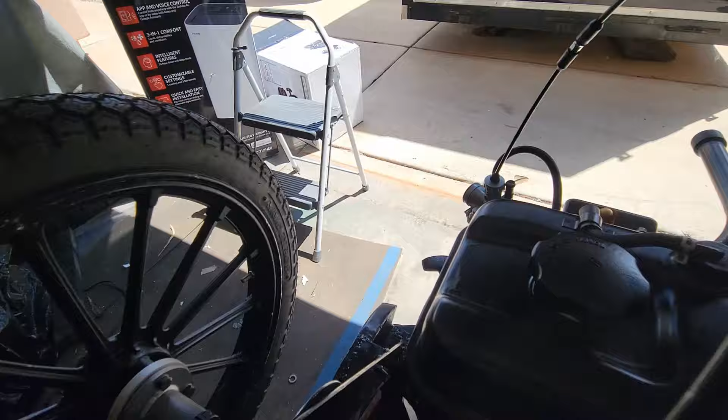Alright, I don't like spinny things being exposed, so we're going to cover mesh up here, so in case we sling a chain or something comes loose, it's not a projectile completely hitting the driver. The idea is, like the Inspiration car, it has a gas tank here, but I'm going to make it a fake gas tank, just a cover. I don't know exactly how the middle shape will be entirely, but on the sides it's going to have the shape of the original gas tank.

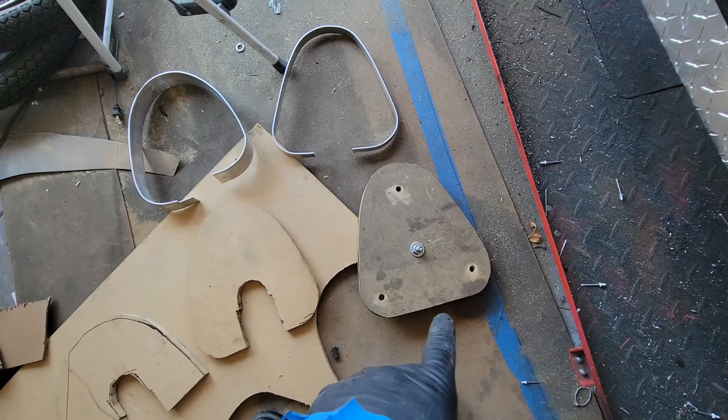So take you through the evolution of making this. I started in cardboard, paper, then cardboard, which I've already thrown away. I made one, didn't like it, wasn't tall enough, shape was wrong, slip back didn't work for me. Let's make it look like the gas tank itself. I got one exactly right, so I ended up drawing it out nice and neat, radius in the corners, and made this one. It's actually two of them, so I can make the sheet metal ends.

And then I goofed around with some aluminum flat bar. There's a 1-inch, here goes a 2. This one's stout, so the 2-inch, this will actually go over the chain. So this will be the chain guard. It'll go underneath, you won't see it.

So I made one end, but I didn't like the 3 holes. I was like, well, it's got to come over here anyway, and maybe later on I'll make a cover that covers this piece so you don't see this ugly axle bearing coming up through there. We'll see if I can do it without these 3 holes on the next one.

This one's just a starter too, I'll end up throwing that one away. If it came out a little bit further, maybe I could just punch a hole in it and it just goes over there. But the problem then is taking it on and off, because the idea is to rivet this thing all together, and then the whole thing will come on and off like this. If I rivet it all together, that might be problematic, but I don't know.

Learning by doing, you know. I might try to do something different. I'm still thinking out loud. But right now I'm going to go ahead and do 2 more of these without those 3 holes. And you know what, I might punch a hole in there. Fuck it, no, I can't do that. It's got to be able to come on and off this way and that way.

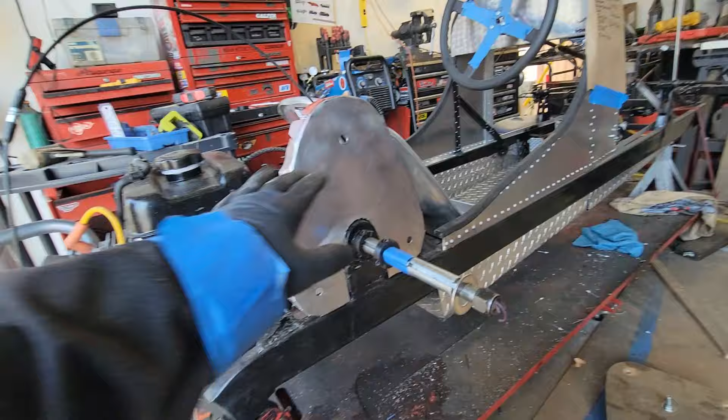You like how I taped my sleeve on there? It's supposed to have Velcro, but the Velcro ruined, it ripped off on that keeper, so I just taped it on. Hokey, but it works, just like all the junk I build. Except for the junk I build doesn't always work.

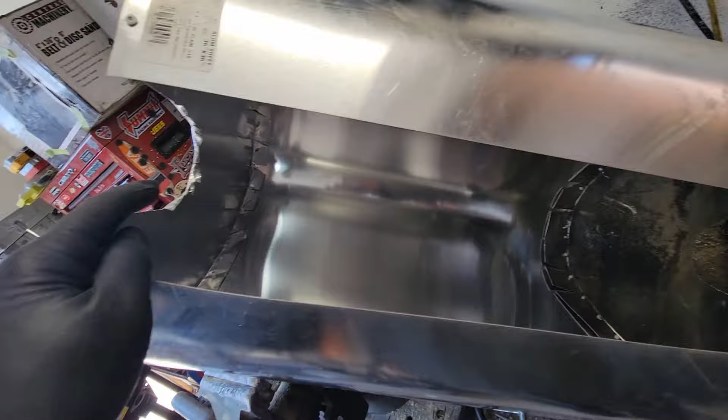Well, it's my first time doing something like this. I use those end pieces. This one was way thinner than that one, and the thinner stuff was easier to work with, but it wasn't as nice to rivet. And this is pretty thin, this is Home Depot 019 - yeah, 019, it's super thin stuff. Looks like a 6, but it's 019, very very thin. And again, this is no structure, this is just a cover.

It's going to dent real easy. In hindsight, this should have been sunk in a little bit better so you could beat that edge over. I did a really bad job, some of the edge got knocked over. I think it looks a little bit better on this side. Yeah, it looks better on that side. Yeah, if I polish it up and view it from a distance, hopefully it won't look so bad.

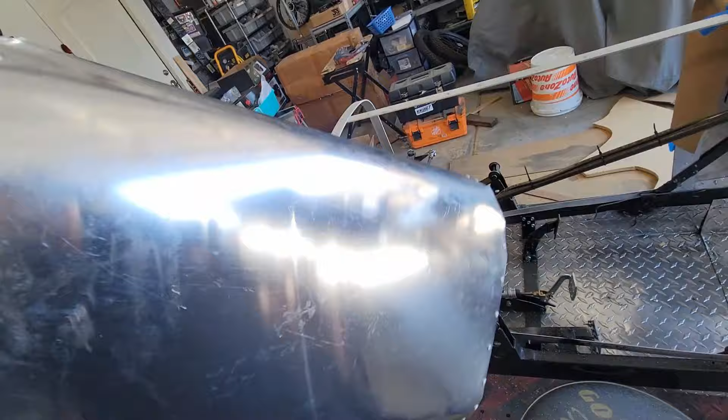Alright, now the difficult part. A lot of it has to be cut away because it won't fit over the engine entirely. It's got to clear the axle and sprocket, and then the back of it's going to have a recess cut in it for the motor, to kind of slip over the motor. Alright, let me work on that.

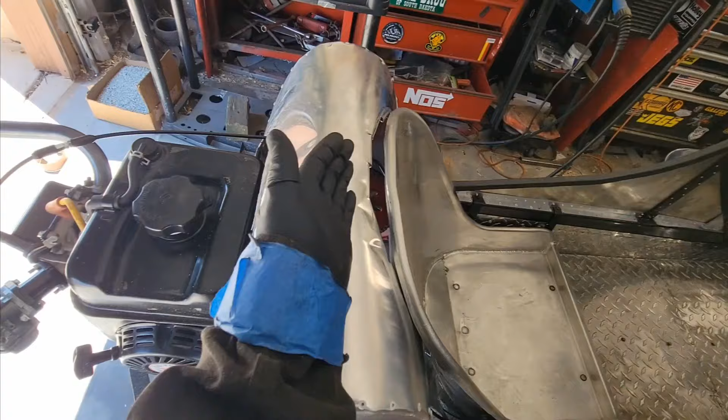Well, it was pretty until I cut all that out of it. It needed a lot cut for this first fit up, but it's on there. I'm going to have to add a piece because the seat just wouldn't fit in there, so I'm going to have to add a kind of shield back there, or maybe not. I don't know, I got that thick bar over there, it's going to cover the chain anyway, so to be determined.

But this is the initial fit up. I got more to cut there to clear the torque converter and the belt. But it's on. What's it look like? Get a look - I like it.

A fake gas tank, or axle chain brake cover, to make it look like a gas tank, kind of. All right, super quick update. Just did the axle, replaced that.

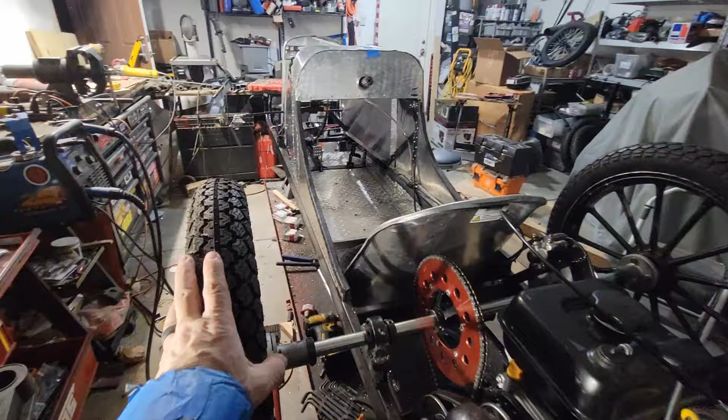I'm sure I did other things since last time I did a video on this, but that's okay. Probably getting tired of me saying that.

I had a 40-inch, this has to be a 40. The way these hubs are, they set the wheel in. It's actually a little less than 40 right now, but I can pull these wheels out another half-inch, put a little spacer on the inside in there, and get them to 40.

The front end actually is, I think, 41. When I built it, I did it without the wheels, and I did it with the spacing on those spindles, thinking I was using the same math and distances for the 17-inch wheels, but 18-inch wheels are a little bit different. And these are the 18-inch wheels.

This is the Edwardian, Chinese, Taiwan, whatever they are, cast wheels.

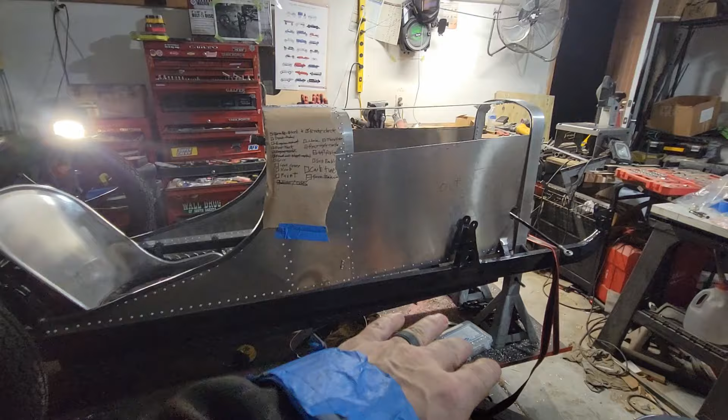But what I didn't do is I didn't do the seat up above the axle. The Inspiration car did have a high seat, the guy sat up on it, but he looked so small and cartoonish driving it, like he was small in it. And if I put the seat up, you're sitting all up high, it's not going to give it that cartoonish look in this one.

So the seat's down. Also, you could drive it more spirited without worrying about flipping it over so bad or pitching the driver. But this thing's so tall and big that I can't see over the dash. I'm 5'5", pretty short, I can't see over the dash at all. It's kind of like when I was driving Cobus's Beast of Turin, it's also big like that. I got to look out the side.

But that's cool, it's cartoonish. It's like I'm back in the day, sticking my head out, trying to look around, seeing things. My big friends, they'll drive it, they'll be fine, they'll be perfectly fine.

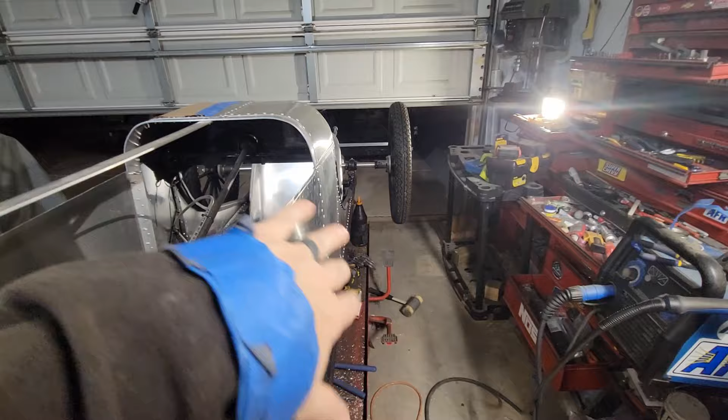Grill shell. I use the MDF trick I talked about earlier. Make your template in 3/4 MDF, do that for your dash hoop, and that way make your mold or make your MDF template out of that. And then you could bend the metal to it, get it right. You can do the dash hoop and then the front cowl hoop.

Then I made a different one for this front grill, this piece. And then looking at it, what am I gonna do for a grill? I was thinking about fiberglass in it, but then, you know what, I said let me see what this looks like with a piece of 2-inch.

So this is 2-inch by 1/8 aluminum flat stock. I painstakingly bent it and get it. It's a super pain in the ass bending this in the vise to make it look smooth and right. Probably spent an hour and a half just bending on this thing. Oh, easily hour and a half. I might have spent longer than that.

Some riv nuts, pardon me. Let's see, riv nuts down in there. You can't see that one because I got a clamp. I got a riv nut in there, so it'll screw in there, and there. That will actually be the radiator cap, we'll screw that one down. Don't know how to do the insert yet.

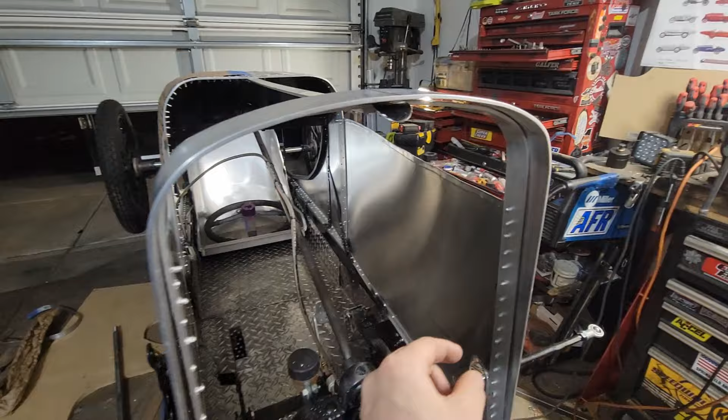I'm still weighing ideas on doing the insert. I might do a piece of angle aluminum in here and rivet it to this hoop. But I want to keep this as smooth and clean as I can.

And then I'm gonna paint it brass to give it that brass look. And the color, actually I just practiced with the brass, some brass paint right there, Rust-Oleum metallic. It doesn't look bad, it almost looks like goldish. I think it's gonna work all right.

Yeah, it's not perfect polished brass. You could polish it and you could look like a mirror. That's not gonna do that. But then it's gonna look like brass.

And this is, I wanted a blood red, and this isn't exactly a blood red, but you can see my reflection in it, kind of. This is colonial red. When I saw colonial red, I saw the color of the cap, I was like, man, that is pretty cool. So I think I'm gonna like it. So black and red and brass is kind of the color motif.

Yeah, I think I like it. All right.

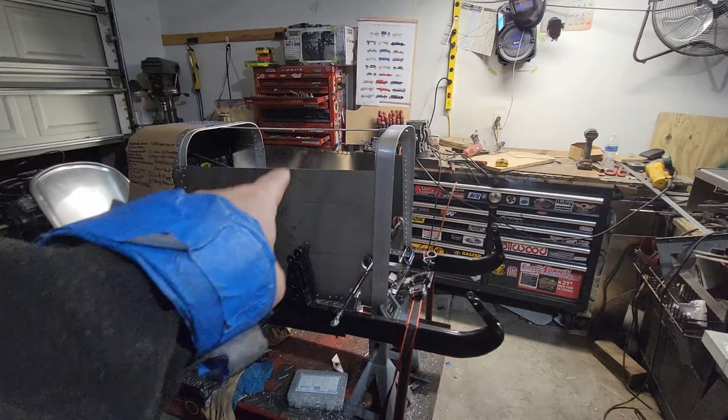All right, what's next? I got to put the front back on. No, I got to finish the grill and then the hood. Grill and then the hood. Then I can do the insert. Maybe I'll do the hood and then the grill, I don't know, we'll see. We're making progress.

Saturday morning, I got my overalls on, cup of coffee. I'm looking at my camera. Head into the shop.

That light. God damn, what a mess. Clean up at some point.

Packing paper trick, this brown paper bag packing material. Whacked a piece off, about the right size for my hood, I think. So we're gonna get the trimming.

Initial trim done. I went around both sides, all three sides rather. Used the flat edge up against up here. I'll skip the video on that, but there's a little catch, I'll show you in a bit, a little catch to catch the sheet metal.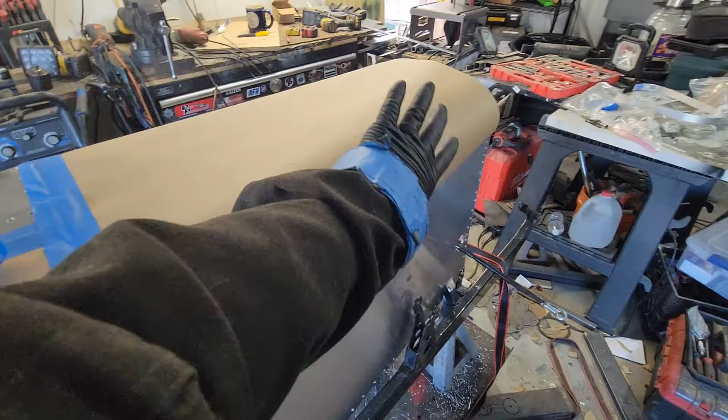I have a very hard time doing this in one piece. A couple of hoods I did previously, I did them in two pieces. I split down the middle and used a hinge, and I found that to be actually easier to do, getting these curves, because it's a little bit of compound. Looks like it's not compound, but it kind of is. Hopefully the English wheel helps out on that. But getting them exactly right, both of them symmetrical, is a total chore for a novice metal shaper, and novice is putting it mildly. That's giving me credit that I don't have. A challenged metal shaper, so anyways, getting ahead of myself.

So anyways, shaping - I'm going to take my magic marker, mark on the inside, and then when I transfer it to metal, make sure I leave like 1.5 to 2 inches on the outside of that. Let's marker that up though. Quick marker job, quick one. Do it a couple times, a couple bits on there. Do it a couple times, did it mark pretty good. Feels about right.

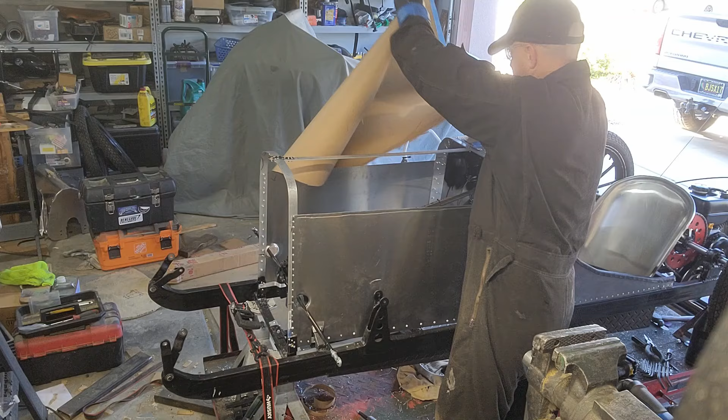We have the template, I'll transfer it to some sheet metal.

Nothing but the best - Harbor Freight, Chicago Electric.

What I did was I gave myself 1.5 inches or so of extra around my template. I just used masking tape, the template I marked on the metal. And you know, there's a ball side and then a mill side, I guess, or probably said it incorrectly, but there's two different surfaces usually on this sheet metal, either on purpose or by accident, but you figure out which side you want on the outside. I'm painting this car so I don't really care, but if you're gonna polish the hood, just take that into account, obviously.

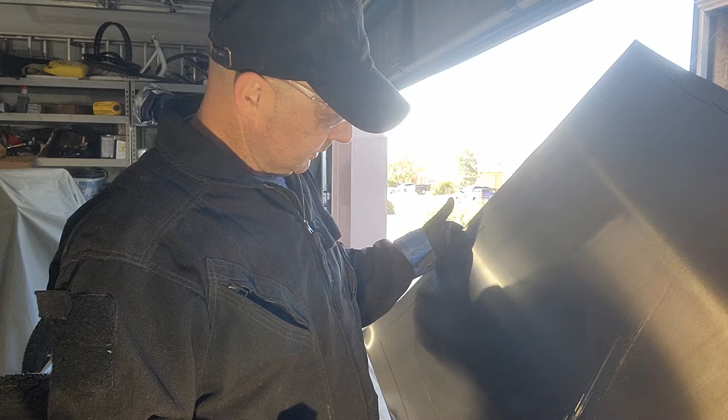So now comes the hard part. I'm gonna mark my lines on this, do some mock-up, and then mark lines on it where I think the curves need to go, and then maybe I'll bend it over my knee, or maybe we'll break out the English wheel. Let's see.

All right, I'm not gonna video this, unfortunately. I'm going to just work, then I'll see what kind of a product I get, and we'll talk about it at the end. YouTuber extraordinaire, I am not.

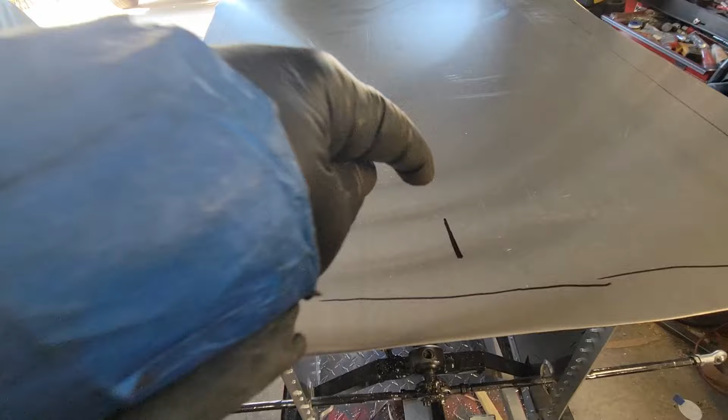So I marked a reference point for the center of the cowl, marked a reference point on the hood there. I've got the center up here where that goes, center there. And then what I'm going to do is come in with a marker and mark some lines where this curve needs to be. The center of the curve will be the longest line, and then the lines will get shorter. I'll do them here and then back there, so I have a straight line, so I know theoretically where my curve needs to be. And in the past, I've done this over my knee.

This time we're going to give this little mini wheel a go. If I can't figure it out with that, I've got the big wheel I got from Rick Eggers in that big box over there that weighs a ton. I don't really have room to set it up in here, but I wanted this to work right, so we'll set that up out in the driveway if we need to. But we're gonna spend some day working on the sheet metal, see what we can do with this hood. Let's have a go.

All right, so this thing works pretty good. I'm an idiot and a novice, a newbie, so I've only used that thing a little bit so far. I've got two other pieces, maybe the third or fourth piece I've had in that English wheel. It ain't terrible. We've obviously got more work to do, but it's not terrible.

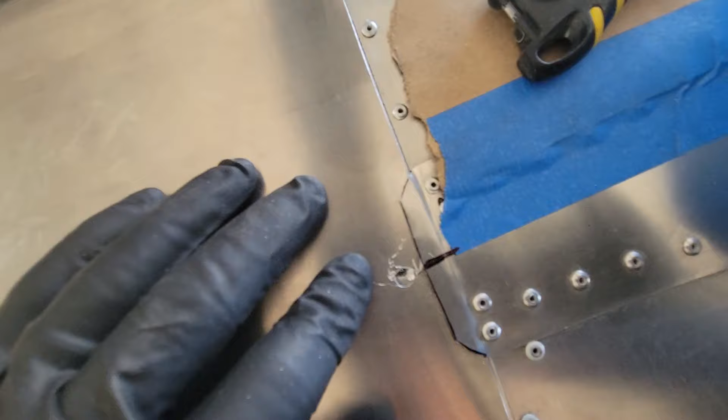I just spent the better part of an hour working the fit up here. So a hole centered, I got to figure out a rivnut or something in there, and then working this seam with a grinder and a file, getting that fit up as best as I can.

I like tight gaps if I can get them. It's not going to be that tight, but it'll be okay. More work to do - it's a little less than 1/8 of an inch there. I've got a little bit more file work to do to get that clean, and then we'll put this back in the wheel. It's coming along.

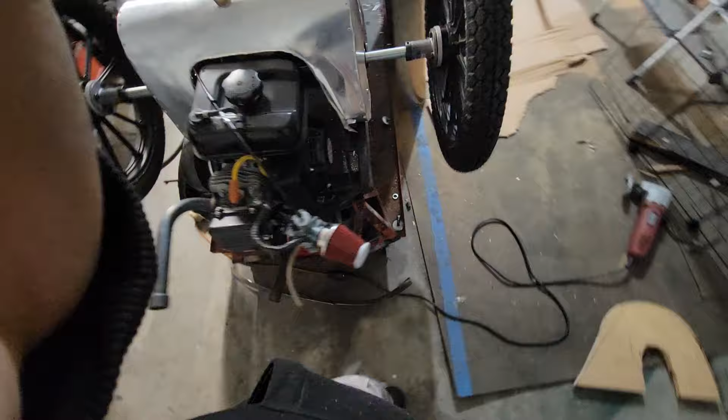All right, we're going to do a little walk around of this 1910 American Underslung Speedster. I'm hoping this is my last set of images and video of this thing before I paint it, because right now, as I'm doing this front suspension, the underslung front suspension, as I'm talking and umming to the camera, I believe I've completed everything - the major parts. All the major parts are now finished.

So this is an American Underslung Speedster. Harry Stutz worked for them as their primary engineer. They were notable because they were very expensive - they were the first American big block sports car, they had a giant motor in them. And the Speedster, which is the one I'm making here, was America's first purpose-built hot rod, if you will. Let's have a look at a picture or two.

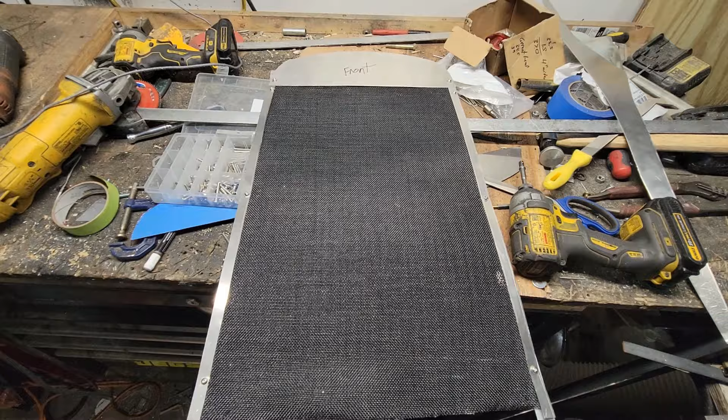In order to get that look right, you got to put the art in Cyclekart. These are art projects, make no mistake, it's definitely an art project. I did many different versions of just this little grill insert, just trying to get this right, to get that look right. And man, this thing was tedious - the hood took half as much time as this effing grill insert right here.

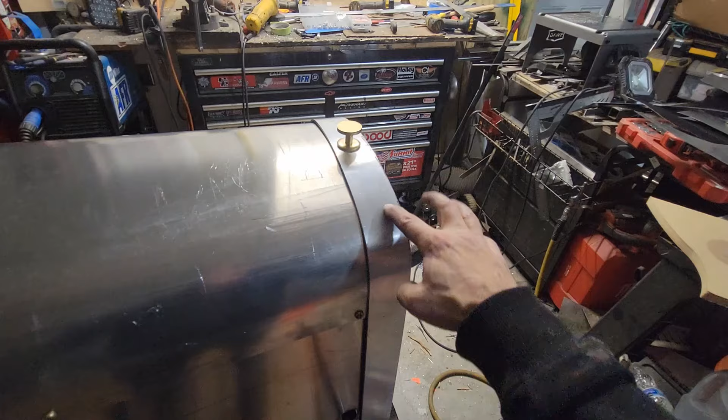Let's do a little assembly here. Boom, all right, hood goes on pretty easy. I make my hood fit between the frame, or that top hoop, and whatever my grill support is, or the outside of the shell of my grill. In this particular one, I used a 2-inch wide aluminum flat stock.

And then you saw the grill insert, it just slips in there. This bolt goes through all 3 pieces - it goes through this, it goes through the hood, and it goes through the edge of that grill insert, so it locates all that and holds it all in tight.

And then I've got some fasteners down there, and for fasteners I got brass flat tips, trying to look period correct. It was a brass era car, so we're going to try to do the brass stuff. All right, there's a minute. Let's see if the next video I have is it sitting on its wheels and painted.

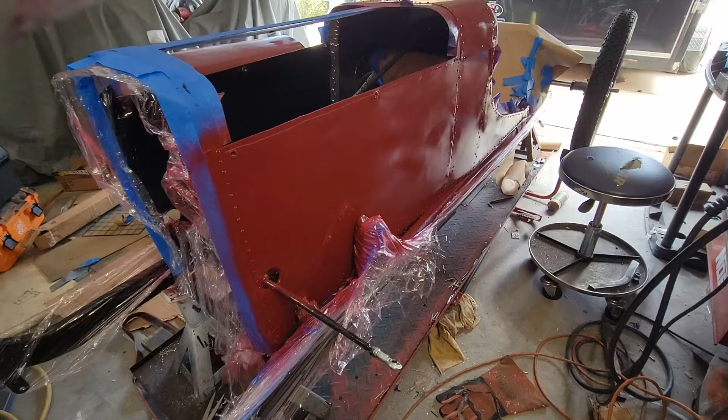And back apart, obviously, with paint on it. Let's see what we look at here. It's a little pink. There's reflection in it, so that's good.

I put some - so it's cranberry, it's Rust-Oleum cranberry, dark red. I did, was that, or a colonial red? So I did this side with colonial red, numbered it, did that one with cranberry, numbered it, and then I had the wife and kids all take it one by one, tell me which they preferred, and they all preferred the cranberry, which I wanted it blood red.

So hopefully that's what it ends up being, but you can see, it definitely doesn't look the same here. It could be because it's wet, it's got some dust on it, I don't know. But that looks more like this right now. Well, it's still not the... it looks lighter, it's like it's got pink to it. I don't like the pink. I don't know what that's about.

No, it's actually kind of looking the same. It's just wet, it hasn't dried yet. All right, it's gonna be cranberry.

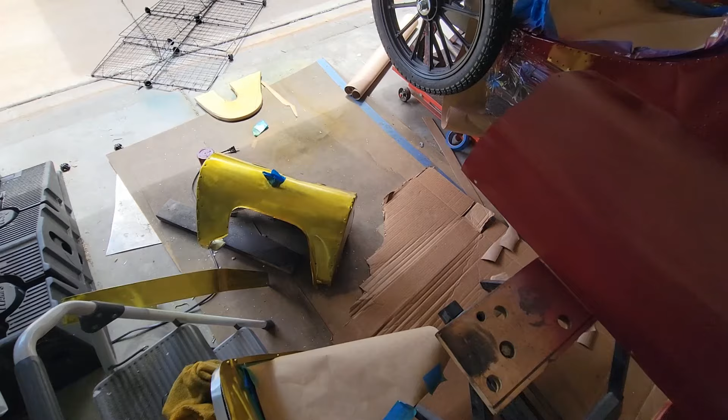So we got the hood. I did the grill and the gas tank in some crazy Duplicolor yellow anodized paint. It's made for chrome, metalwork, chrome trim, and aluminum. It is definitely yellow anodized, not brass, but I think it looks good next to the red.

Oh, I want that to come off. Hard to see there. We'll see, it's definitely an art project.

Because if I got to do touch-ups, the gloss is on there, and that might make it difficult to do a touch-up. But I'm not sure — not sure if you hear the doubt in my voice, because there's definitely doubt. I don't know exactly what I'm going to do with that.

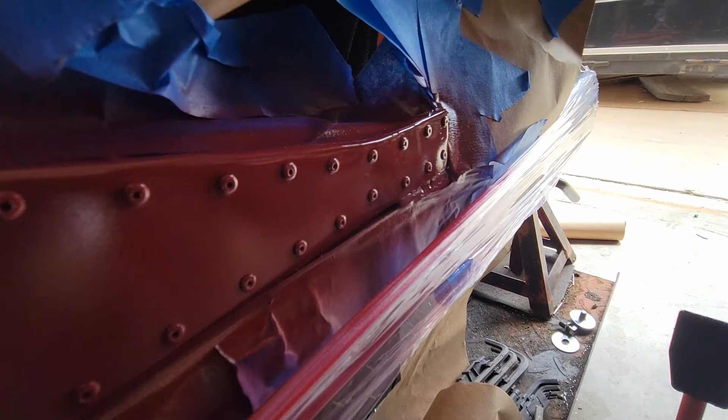But some of these areas really look good. I don't know if you can see, but it definitely looks pretty decent. It's got the vibe that I wanted — that pre-war, early America, industrial, handmade look. I'm feeling pretty happy with it. Let's see what it looks like all put together.

Here you go, folks: the 1910 American Underslung Speedster — Cyclekart version anyway. It's a big day, we're off the lift, we're out in the driveway. Still got some testing to do on it.

American was a company that wanted to make vehicles that rivaled the opulence and extravagance of the European crowd of the day. I think they did a very good job, but it was very expensive, and World War I came along and kind of ruined things for them. But I really wanted to capture that Art Deco, magnificent big presence.

Cyclekarts aren't meant to be super big all the time — they're kind of meant to be small and cute. Cuter is better on a Cyclekart, but I had to do this American justice.